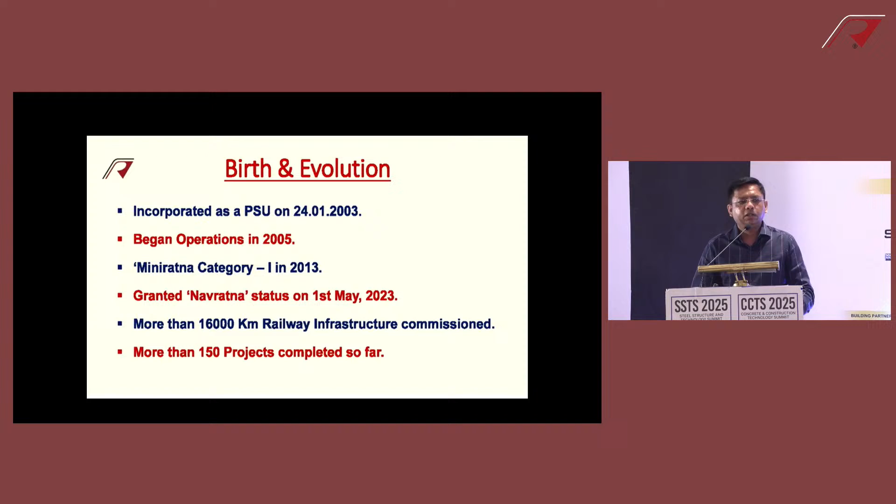Before I begin, I'll give 2 slides on the company I'm working in. I'm on deputation to RVNL. RVNL was a very new company, just formed in 2003, began operations in 2005. We got the Mini Ratna category in 2013, and we were granted Navratna status in 2023. We were primarily into railway infra, but now we've moved to global infra, with presence in highways, airports, and many other projects worldwide.

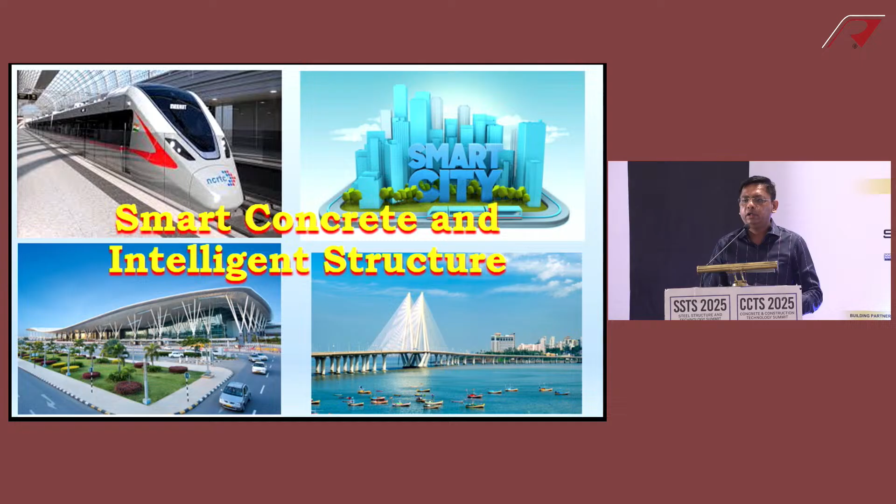The theme we're discussing today, smart concrete and intelligent structures, is very relevant at this point in time, at a time where the nation stands today, and when we think about what we are today and where we want to go 25 years from now. Our Honorable Prime Minister has given a vision to the nation called Viksit Bharat, which means a vision of making India a developed country. So long we have been hearing India described as a developing country. It's time for India to achieve the status of a developed country, and we have a vision to make it a developed country on the 100th year of our independence, that is 2047.

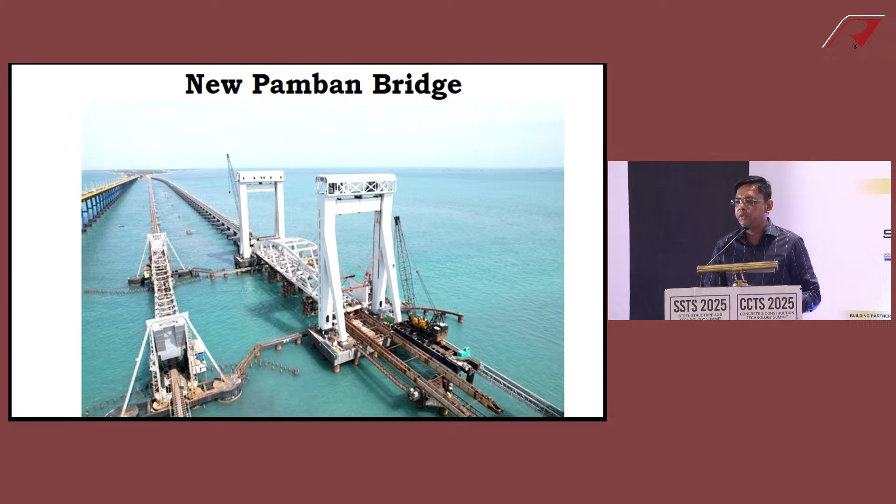One of the modern engineering marvels that RVNL has constructed and just commissioned is the new Pamban Bridge. It's the first vertical lift bridge of Asia, and the Honorable Prime Minister has recently inaugurated it. The old one was a Bascule bridge, and everyone knows it was partially damaged in the cyclone of 1964. Dr. E. Sridharan supervised the restoration, and the old one was a marvel. The new one is even better.

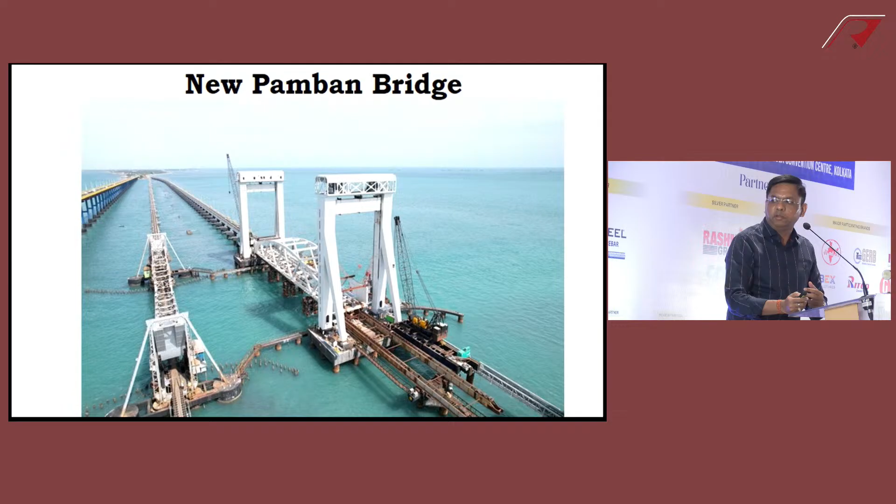This is the Burdwan cable stayed bridge. Why is it important? It was a smart solution to one of the problems. Traditionally, railway lines run through the most important cities, and as cities grow, you get a lot of jams at railway crossings, so these level crossings were to be eliminated. Every major city has a very big railway yard, so if you have a limited span ROB there, it poses two kinds of problems. If you have small span ROBs, there were pillars and piers in between two railway tracks, creating a permanent bottleneck in yard expansion.

So there was a need for a structure with a span long enough, but at the same time the level difference from the top road level to the bottom of the girder should be minimum, because most of these were replacements of existing ROBs, where both levels are fixed - the approach road level and the bottom of the girder, due to clearance from the rail level. For that need, at Burdwan we went for a cable stayed bridge which solved the problem, and now we are building another iconic cable stayed structure in Howrah called the Chandmari Bridge. The erection is almost complete, and very soon we'll be able to commission that bridge too. So that is a solution to these problems.

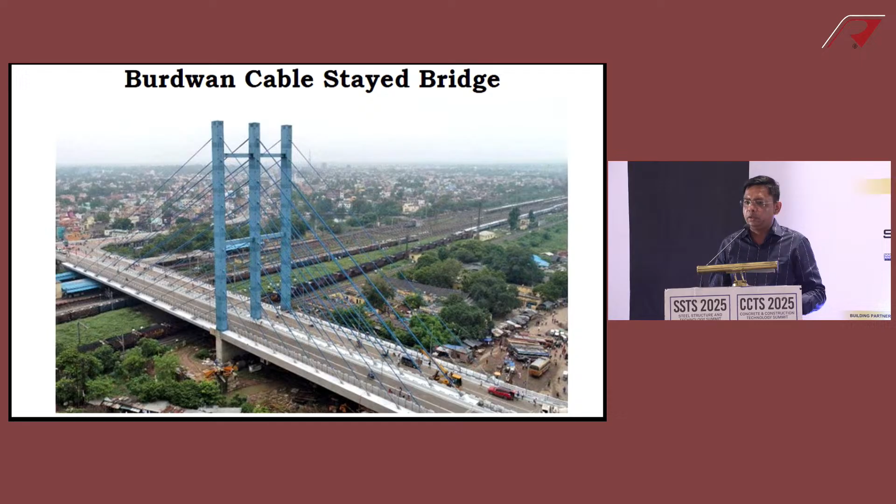Metro projects in Calcutta - RVNL is constructing two major lines in the city of Calcutta. The purple line runs from Joka to Esplanade, which is under construction and I'll explain in more detail. The orange line is from New Garia to the airport, which is also progressing at a fast pace. We are trying to reach City Center 2 by March '26.

A very important station, a smart structure I would say, that we have recently constructed is the Majerhat station. The problem was that when we were constructing this station, the area, called New Alipore or the Majerhat area, is equally populated on both sides, meaning both sides of the metro station need to be given access. If you plan access on one side, the other side is devoid of the facility, and vice versa. So what has been done is a station built over the railway yard.

The Times of India covered this - it is the first metro project with a metro station built over a railway yard. Down below you see the conventional railway lines of the Sealdah division of Eastern Railway, and above is the metro station built over the railway yard itself, with the concourse over the yard. You also see the Majerhat bridge, the cable stayed road bridge here. There is a connection from the metro station to the Eastern Railway Sealdah division station, so suburban passengers can take these stairs to the metro station and take a metro ride, and vice versa. Just outside the Majerhat station there is also a bus stand.

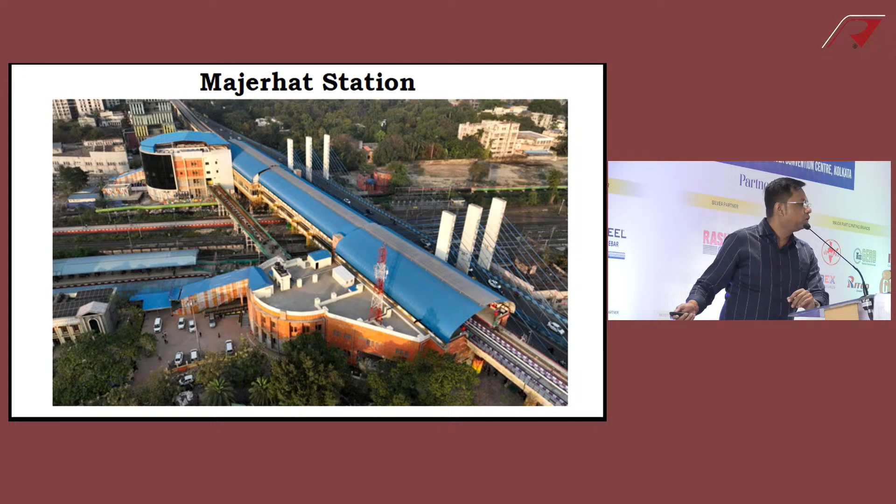This is a first example of multimodal connectivity, a place in Majerhat where you have connection of the bus, the metro, as well as the suburban transport. This is what was conceived in Anand Vihar also, the multimodal transport hub, where the metro, the bus stand, and the NCRTC are all at one place.

That is why when we talk about the national transport policy, they talk about a smart card, meaning every passenger should have a smart card valid across various modes of transport. The same card should be used for buses, the metro, and so on. This is something we are planning, and probably it will be implemented.

This is a recent breakthrough we had in Rishikesh Karnaprayag, another iconic project going on from Rishikesh to Karnaprayag, more than 100 kilometers of line. This is the first time a TBM has been used in Himalayan geology, and we have done successful tunneling on 14 kilometers here, with the breakthrough achieved last month.

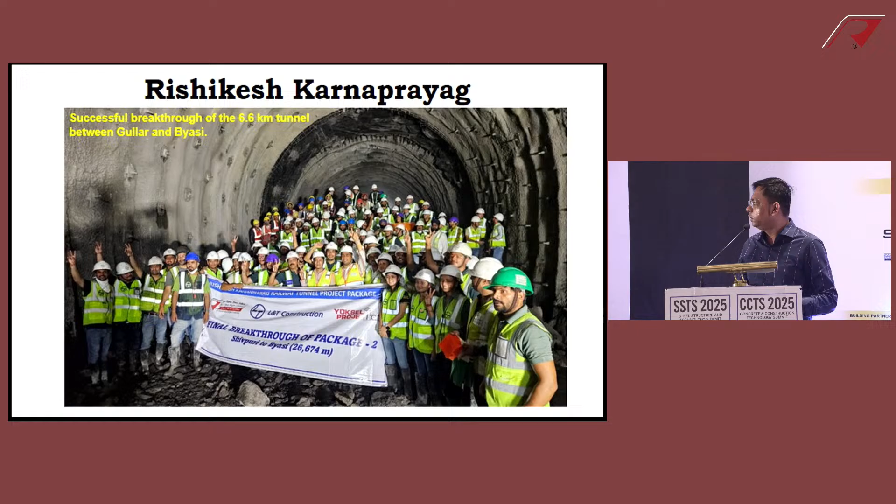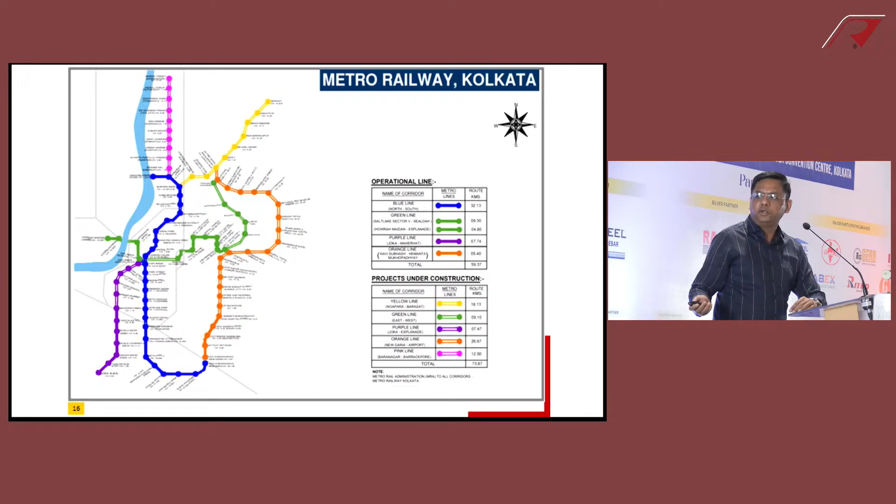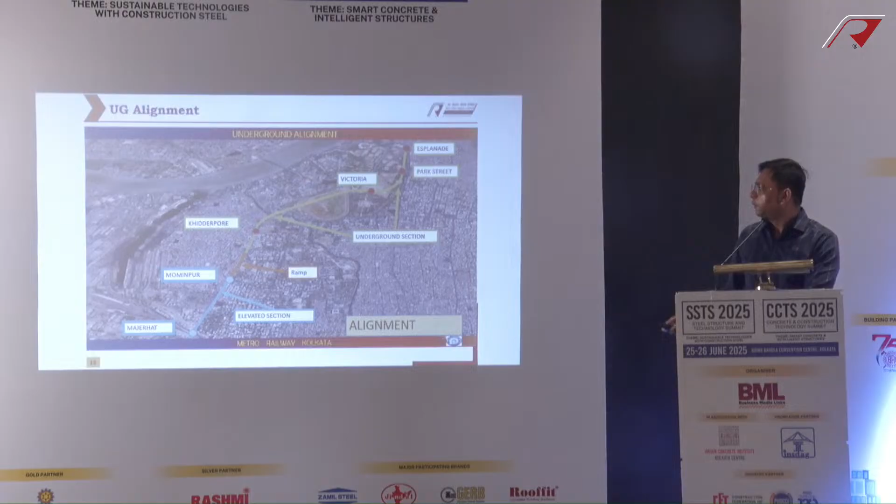In the Joka BBD Bagh section, Joka to Majerhat is already in service, and from Majerhat to Esplanade is the 3rd phase we are constructing. The underground construction is in progress, and tunneling by TBM will start very shortly. This is the overall alignment of the underground metro project.

For example, in the Joka BBD Bagh case study, we are making the entire corridor underground, going under the defense establishment, so a lot of time is taken getting approval from the MOD itself. Once you go further, we have heritage structures, so permission has to be obtained from the ASI. We also have to coordinate with the PWD at all times.

We have to take traffic blocks from the police and the KMC, because the moment you talk about piling or underground work, Calcutta has a lot of underground utilities, mainly by KMC and many other departments. So utility shifting itself becomes a big project within the metro project.

This Joka BBD Bagh project is the first where we have planned transplantation of about 1,000 fully grown trees, apart from 5 times that plantation has been done elsewhere, taking care of the environment as part of sustainable development. If you're talking about an intelligent project, it's a holistic package, not only civil engineering but also electrical, signaling, and environment as a whole.

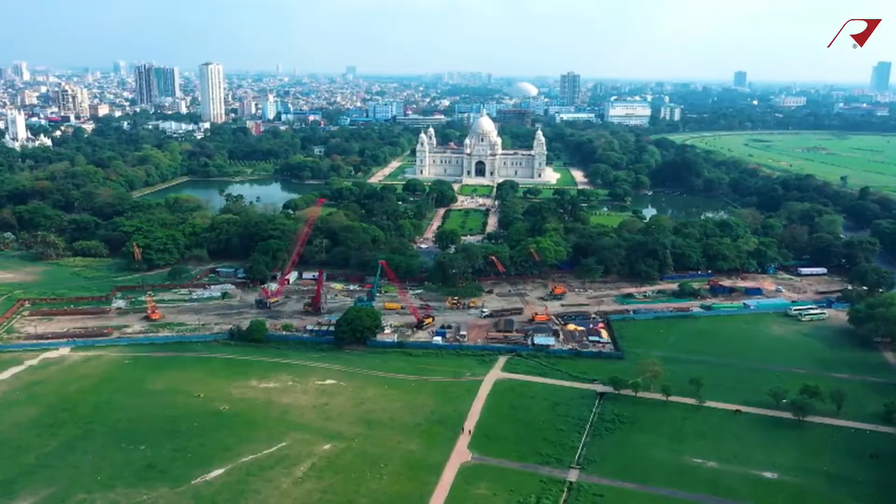In modern times, one of the challenges faced in planning infrastructural projects is maintaining a delicate balance between development and environment. The prestigious and technically complex project of Mominpur Esplanade Underground Metro in the great city of Kolkata also faced this challenge.

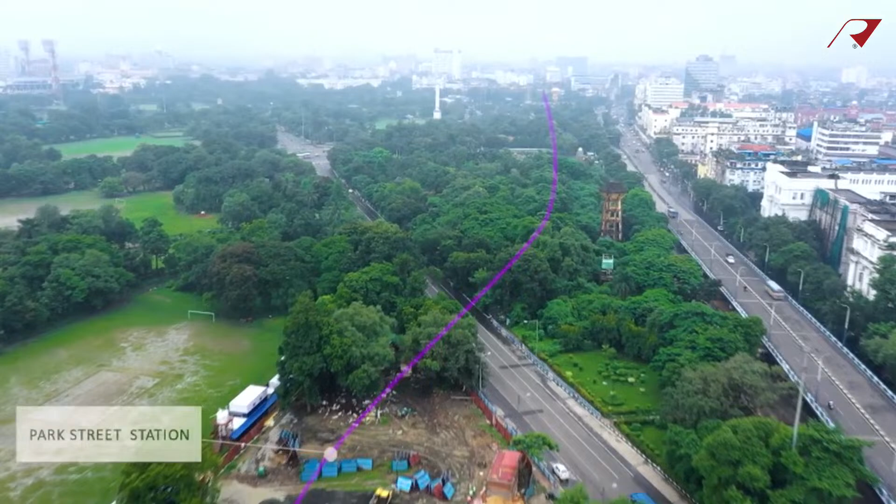In modern times, one of the challenges faced in planning infrastructural projects is maintaining a delicate balance between development and environment. The prestigious and technically complex project of Mominpur Esplanade Underground Metro in the great city of Kolkata also faced this challenge. There are approximately 1,000 trees in the alignment of the project.

In normal circumstances, trees are felled by doing compensatory plantation. But in this case, RVNL not only did 5 times compensatory plantation against each tree, but also transplanted each and every tree without cutting a single tree. You heard it right, all the trees in this project have been transplanted.

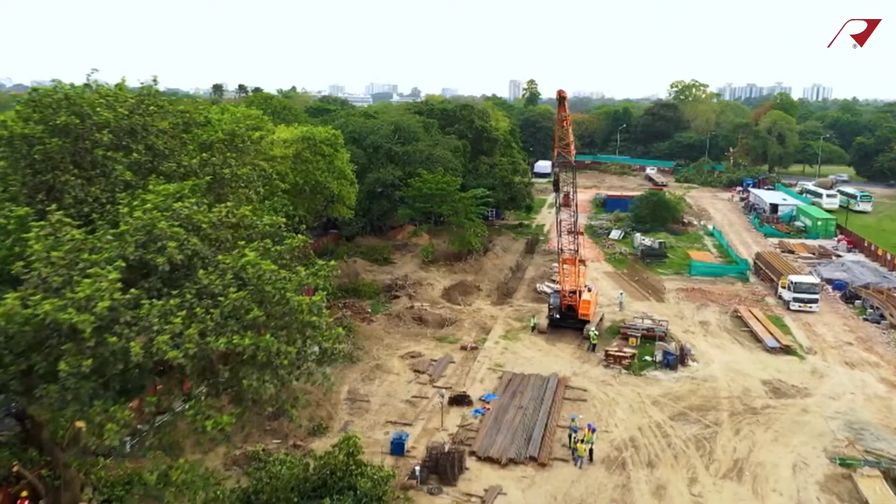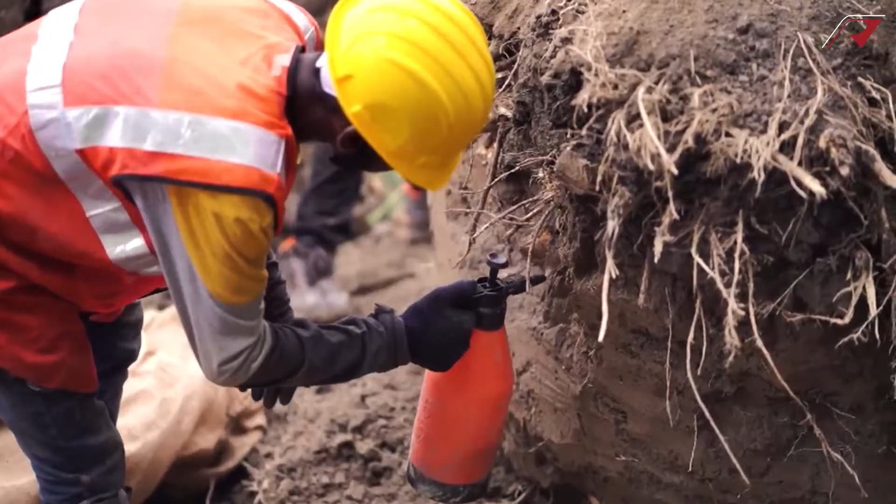RVNL and L&T collaborated and prepared a detailed method statement to execute this work of transplantation in a scientific manner under expert supervision. The big and heavy trees are first trimmed to make them lighter and transportation ready. Then the soil near the tree is excavated. The roots of the trees are treated with special chemicals to enable them to retain moisture and nutrients during the process of transplantation.

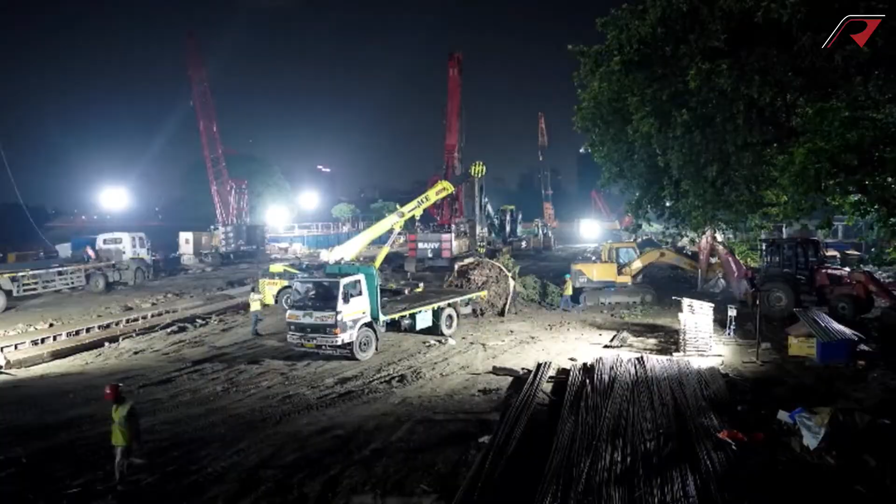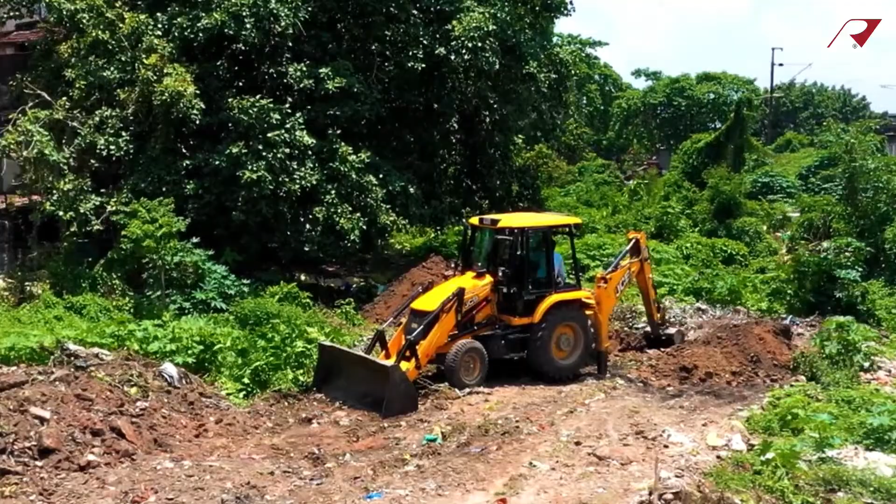The tree is then extracted from the ground using a road crane and loaded on a trailer to transport it to its destination. At the location where transplantation is to be done, a JCB is required to excavate the ground, and a hydra is required to unload it from the trailer and plant it back. The tree trunk may initially be supported using ropes from the ground till the tree is firmly rooted in the ground.

With extra care for a few initial days after transplantation, the survival rate of transplanted trees can be increased.

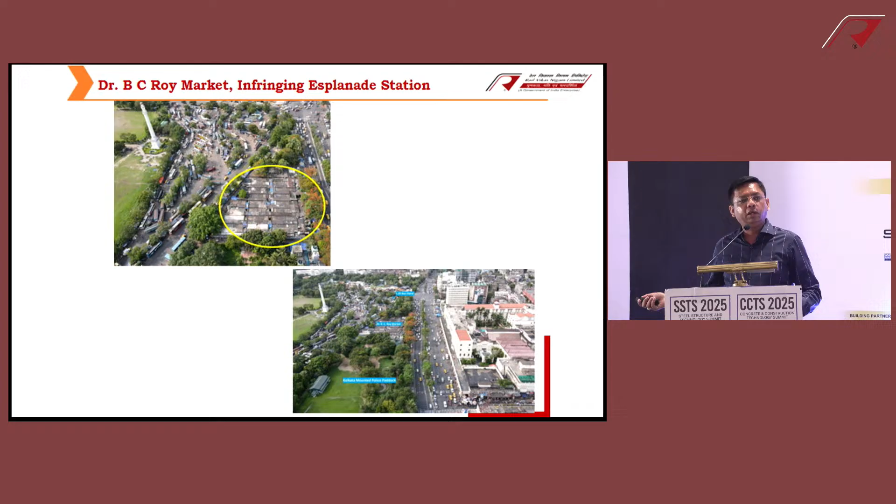So we solved it in a unique manner, we proposed a unique solution. We are constructing a temporary BC Roy market here, shifting all these people here so that their livelihood is maintained and not disturbed, while we construct these stations. So we came up with a technological solution.

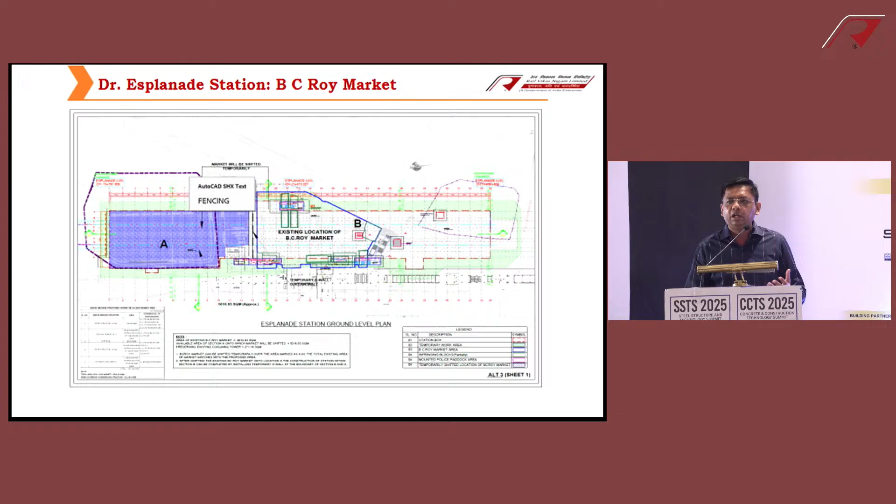Instead of constructing the whole station in one go, the station has been divided into 2 parts. First, this part of the station would be constructed. The top slab is designed in such a manner that the whole market will come back on the top slab, and when this market comes back, the remaining half of the station would be constructed. This way, the status quo is maintained. It's a win-win situation, the people don't get displaced, and the project also gets completed.

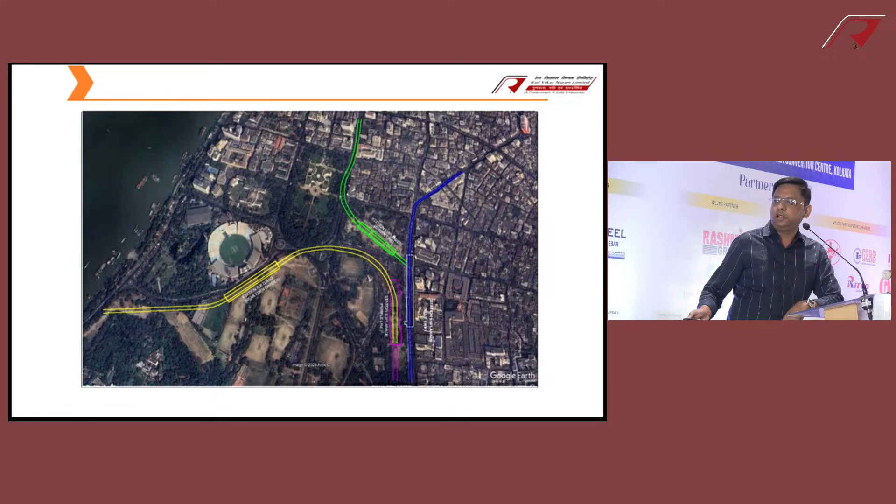This is another thing we planned for the city. This is the old blue line, Calcutta's old first metro line of the country itself. This is the green line coming from Howrah to Sealdah, and this is the purple line coming from Joka side, South Calcutta. So 3 Esplanade stations will be constructed here, 2 of them are already operational, the 3rd one is coming up. This becomes more or less like the Rajiv Chowk of Delhi.

And now to have a seamless transfer, a common plaza to make this whole project, this whole structure an intelligent structure, for ease of traveling, a common plaza is being constructed here. That would enable a very seamless transfer of passengers from one system to another system.

Also, this line is being extended, planned up to BBD Bagh, a new BBD Bagh station near the Eden Gardens, because Eden Gardens did not have any dedicated metro station. The line can be extended right up to here, where in future, if the city plans to have a water metro, because it has a very nice front, we can have a multimodal transport where all kinds of transport are available at one place.

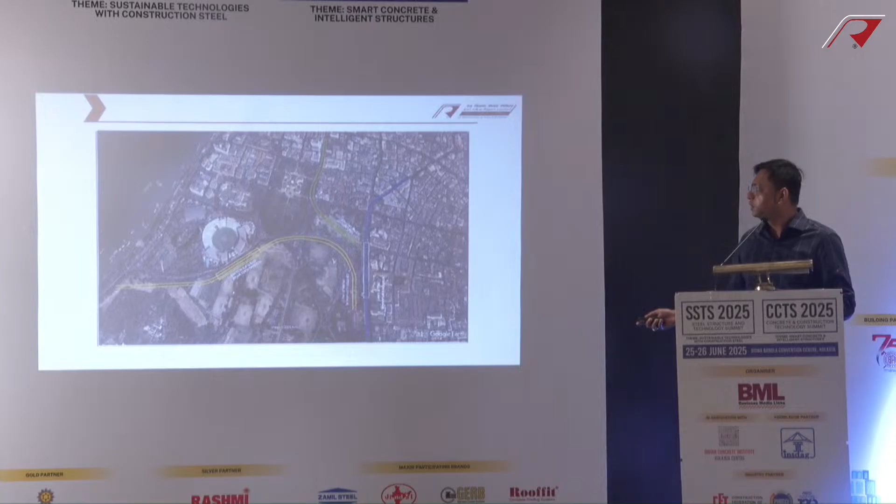This is where the common plaza is planned. We have started doing tunneling. We are expecting to start the tunneling from the St. Thomas School towards the Esplanade in another 1 week's time.

The TBM has been lowered. These are the various kinds of TBMs that are used, and we have used EPB. Every TBM is selected based on the geology that we have. In Calcutta, we have very soft soil, so for that, EPB, which stands for Earth Pressure Balancing Machine, is used.

In other areas, for example Mumbai side, there you have rocky strata. So many times water lines are laid, and a gripper type machine is used for the rocky strata. That kind of machine is used in the Himalayan region, for example, we use the single shield TBM. So depending on your requirement, the TBM is selected.

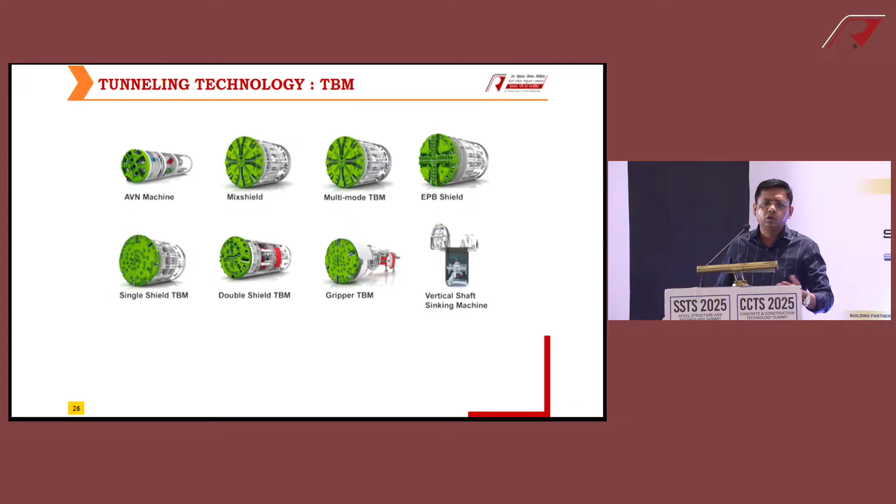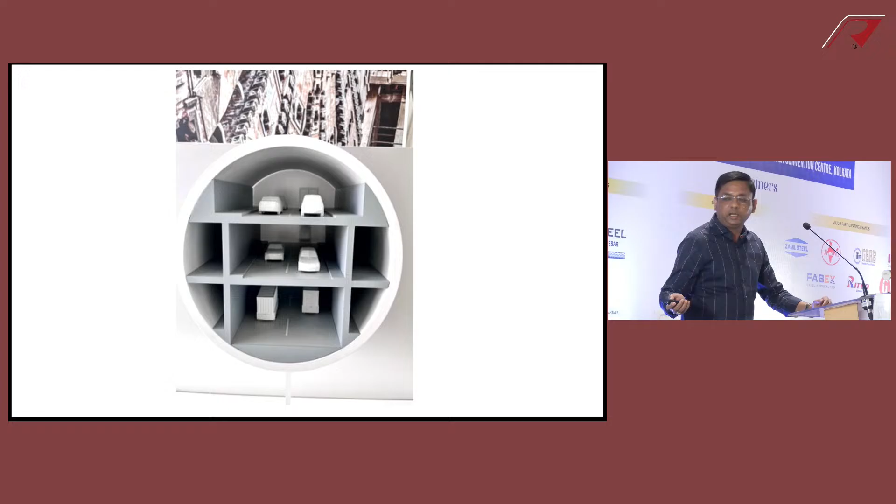This is the alignment of the TBM, and this is the future of tunneling. This is what I saw in Germany at Herrenknecht. Now the tunnels that are made are not only for railway or roadways. It's about making big, large diameter tunnels, and in one tunnel you have the facility for the roadways. You also accommodate the railways, the metro, and more than that, the water supply system, the sewage systems, etc.

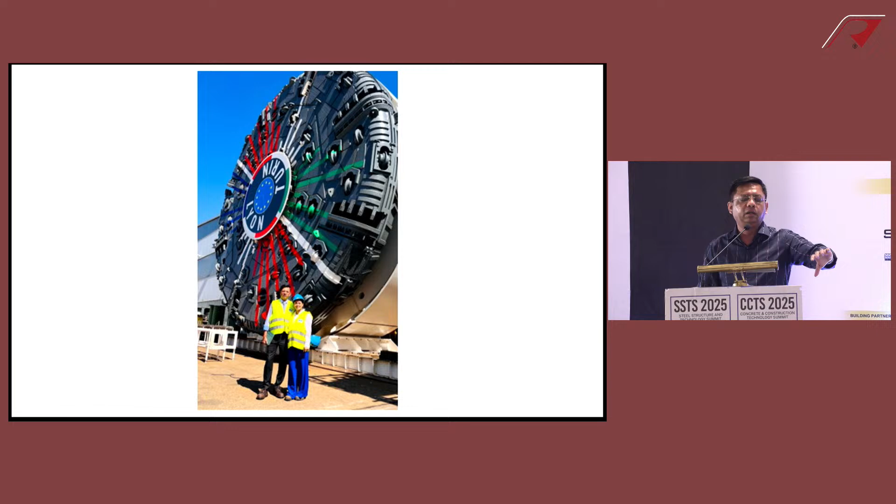This is the 18-meter diameter TBM that they have made. In metro, the diameter of the TBM is 6.3. The ID, the internal finish diameter, is 5.5 meters. But we have machines now which are 18 meters diameter. Once you have an 18 meter diameter, it can be compartmentalized, so you don't need to have a new tunnel for everything. Many of your facilities can be accommodated in a single tunnel.

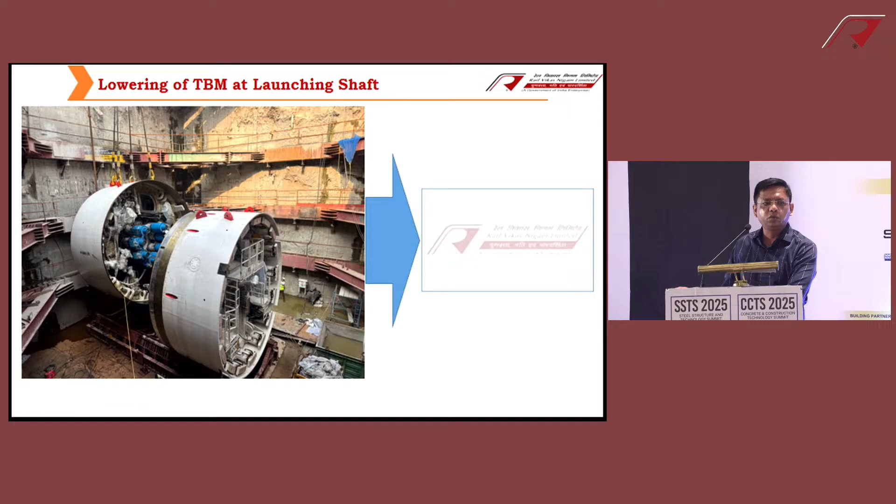I'll just show you the lowering of a TBM that we have done, just completed, and about to start the TBM by next 7 days. I'm sharing with you what we have actually done, not what's written in the books.

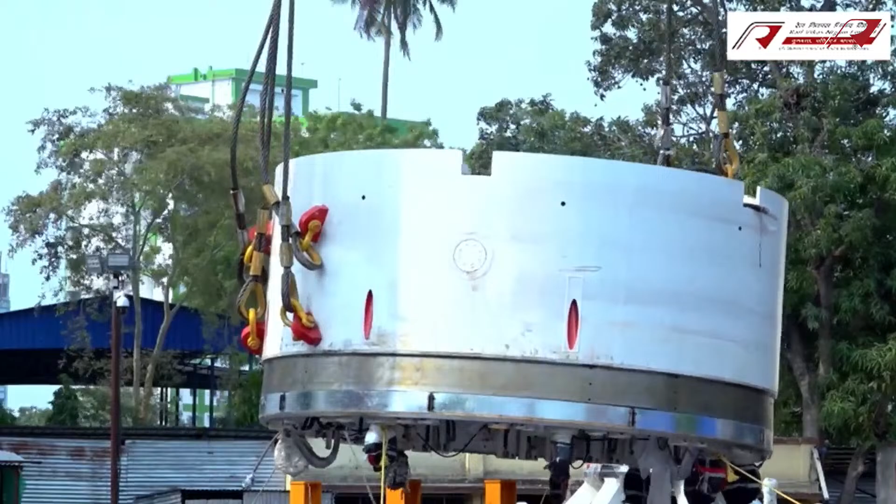That's the metal shield of the TBM. It weighs 130 tons.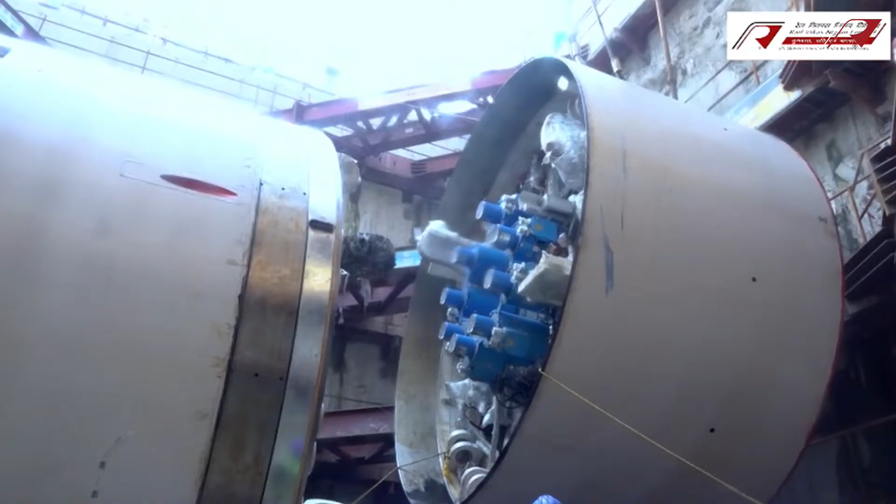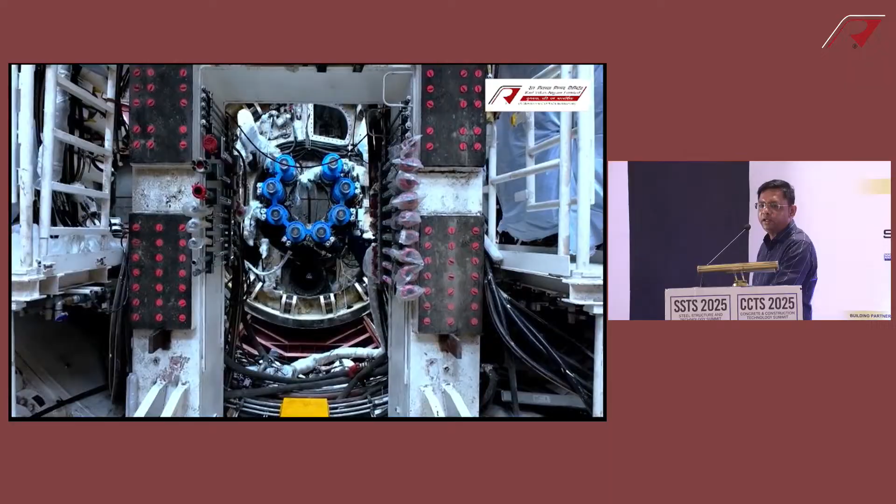The TBM has 3 shields. Each shield weighs more than 130 tons, and a 700-ton crane is used. It's very rare in this country to have a 700-ton or 1,000-ton crane. That's the joining of the shields once they are lowered.

This is the cutter head that actually cuts the soil.

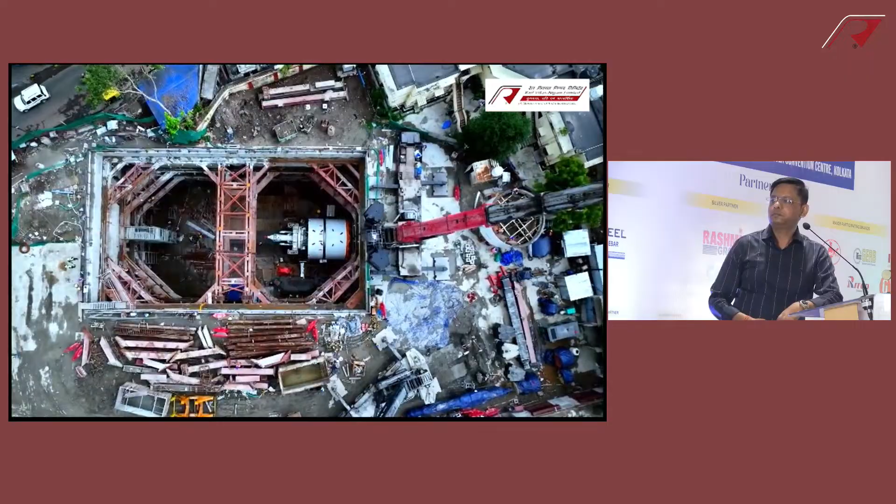St. Thomas School and the church. We are just working beside the church.

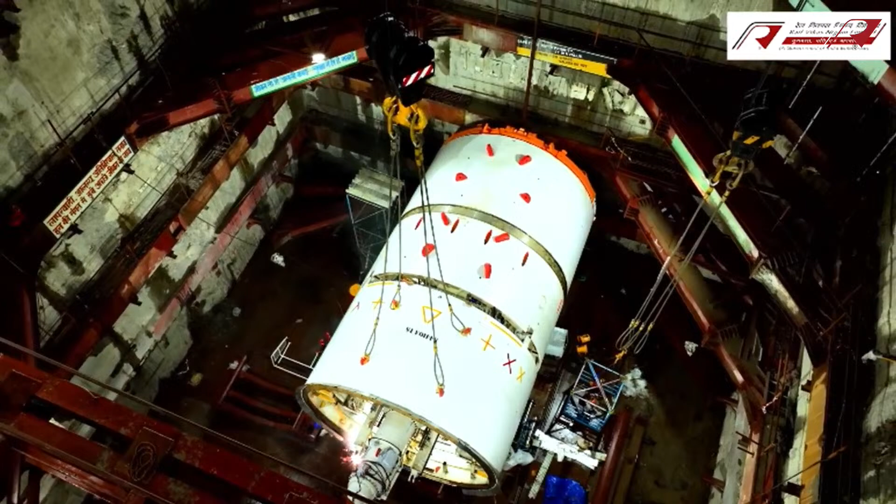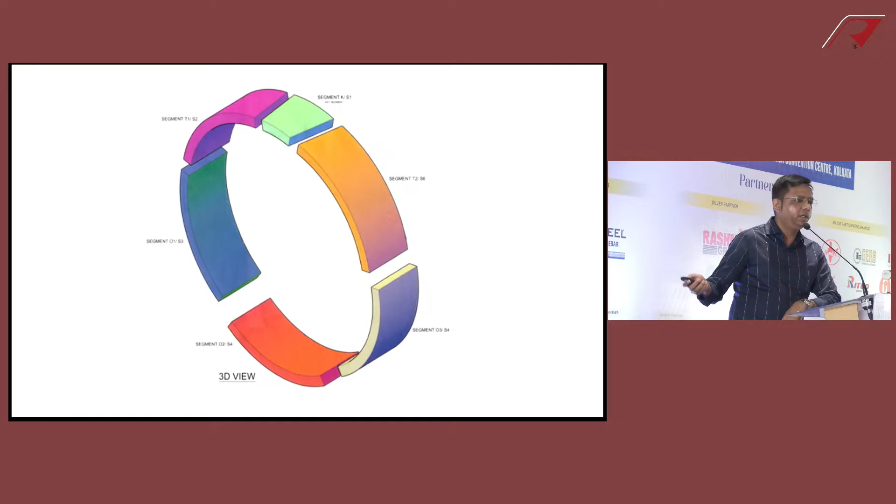So that's 45 days of work I have shown you in 3 minutes. The tunnel that we make is made of these rings, and you join 6 segments and you get the ring. This is how we have already cast 1/3 of the tunnel that we are supposed to build. We have an area called Santoshpur near Rajarhat where we have this casting yard.

It's a very nice casting yard. I would in fact invite all of you to visit my TBM site and casting yard. It will be an enriching experience for you. It's spread over 12 acres of land there.

And this is the underground metro station. Why I'm showing you these two things is because most underground metro projects are made of these two things only: there is the tunnel and there is the underground metro station. Both of them are concrete. So once you understand this, we move to the concrete.

It's a top-down construction that we do in this part of the country. For example, if you go to Mumbai, in the high-speed corridor, I was seeing the Bandra Kurla Complex station that is happening - I'll just show you in the slide. There they are doing bottom-up construction. They have that facility because it's rocky strata, so they can actually go to the bottom level and then start constructing bottom-up.

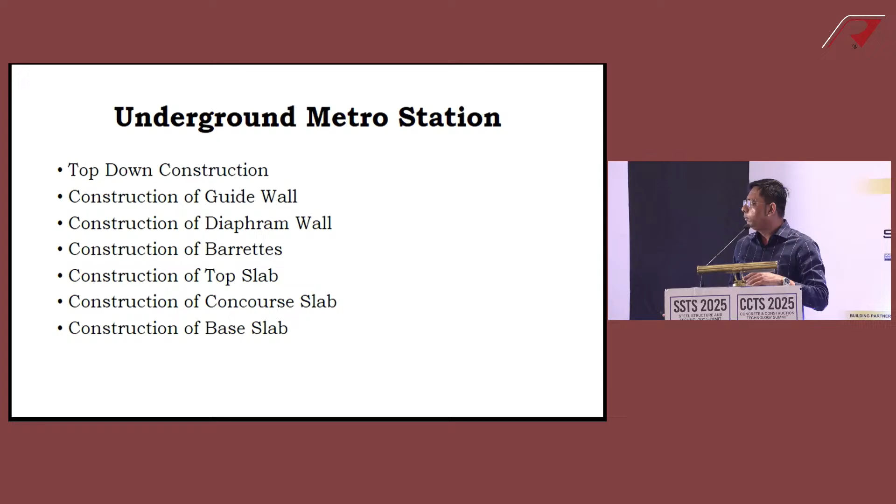But here, because the soil is very soft, retaining it is a very difficult process. So it's a top-down method where you construct the D wall first. This is the D wall, the diaphragm wall, as we call it. Diaphragm wall is constructed first. Once the diaphragm wall is constructed, you have a rectangular form. Then you start excavating from here.

When you start excavating, normally there is a cushion of about 2.5 meters for the top slab. You do that and construct the top slab. There are cutouts left in the slabs. From the cutouts, you enter the excavators down below, reach the concourse level - then, did I miss one part?

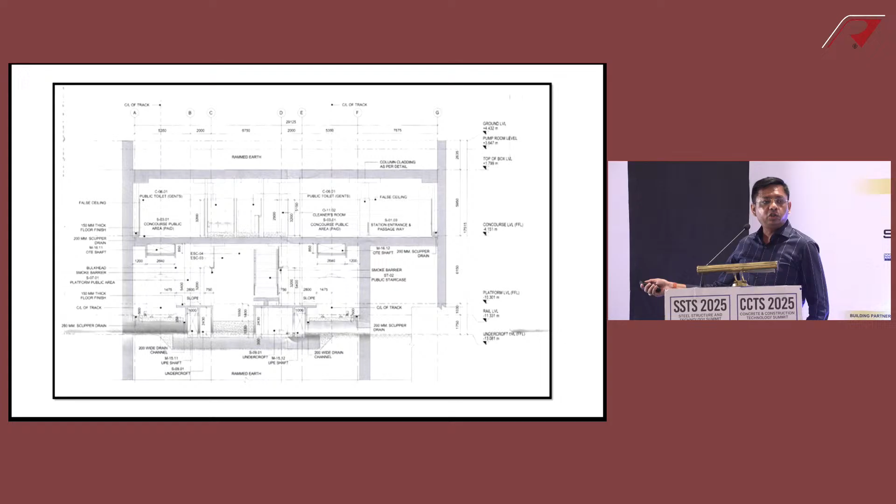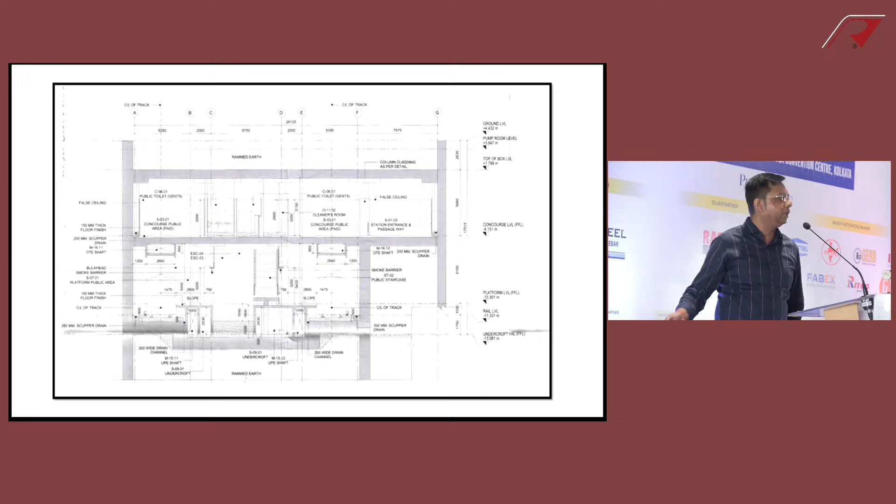Once having done the diaphragm wall, you do the barrettes first. You do the barrettes, then you come to the top slab, then you do the concourse slab, and then you do the base slab. So basically, since you are coming from top to down, it is called the top-down method of construction.

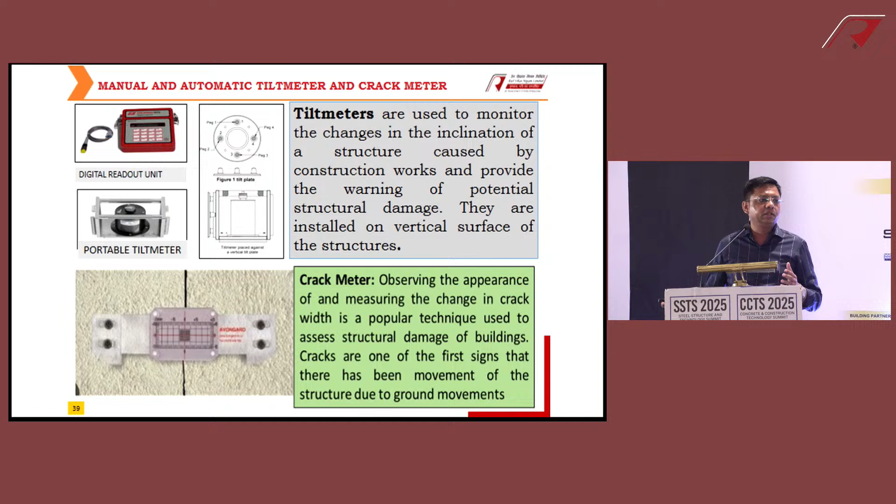So basically, these are our eyes and ears - this instrumentation, these crack meters, inclinometers - this is very detailed, it requires another session to discuss the BCS and the instrumentation, but this is what keeps us alert all the time. Based on this, the alert values, what we call AAA - alert, action, alarm - are generated, and it is very important from the safety point of view to monitor and maintain this.

Now coming to the concrete here, we call it smart concrete. With my understanding - I don't have that much experience, small experience of 23 years - we started in railways, where M20, M30 used to be traditional, considered to be good. Even the RCC boxes, most of the bridges, M35 concrete has been used. But the times are changing.

We talked about the strength of concrete, we talked about high strength concrete. M40, M50 was called the high strength concrete. Then we started talking about high performance concrete. If you see IS 10262, it says that M65 and above is the high strength concrete.

Then when you talk about the difference between high strength and high performance concrete, the compressive strength of concrete is not the only thing - that's an old concept. As sir has already explained, high performance means apart from strength, you're talking about durability. Durability is the keyword that you require. So durability, the performance, the resistance against corrosion, that again depends on your durability.

Now, as I said, I will show you a video. Sir was saying we have already achieved 150 MPa. How many of you have seen that? So I'll show you a video. I've actually broken the cube of ultra high performance concrete in front of me, taken it up to 180 MPa. I'll show you the video there.

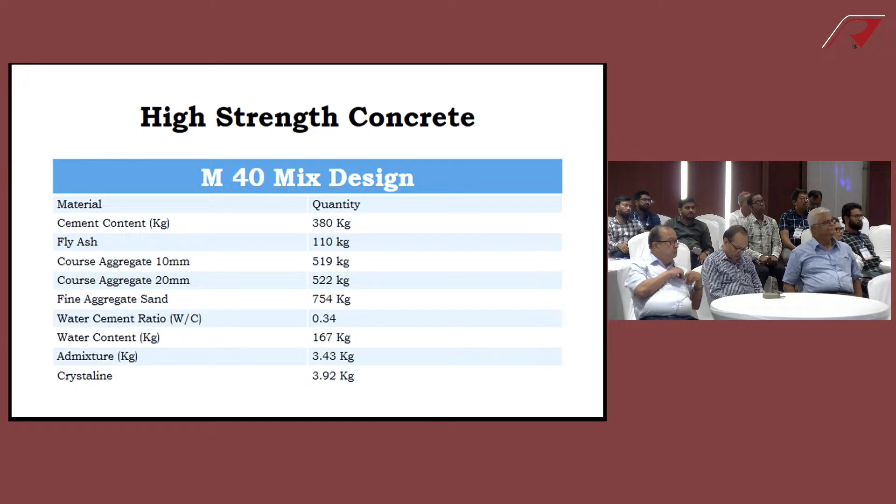So this is the M40 mix design that we are using in the diaphragm wall construction. Again, whatever I'm telling is not from any book - this is actually what we are doing here in the Rajarhat Esplanade project. So in M40 we are using fly ash.

Again, when we talk about smart concrete, environment, you talk about sustainable. Environment is a big thing, and the carbon footprint is very, very important. If I'm not wrong, 1 ton of cement production accounts for nearly 0.6 tons of carbon dioxide, and 8% of the total global emission of carbon dioxide is due to cement production. That's on Google also if you want to check.

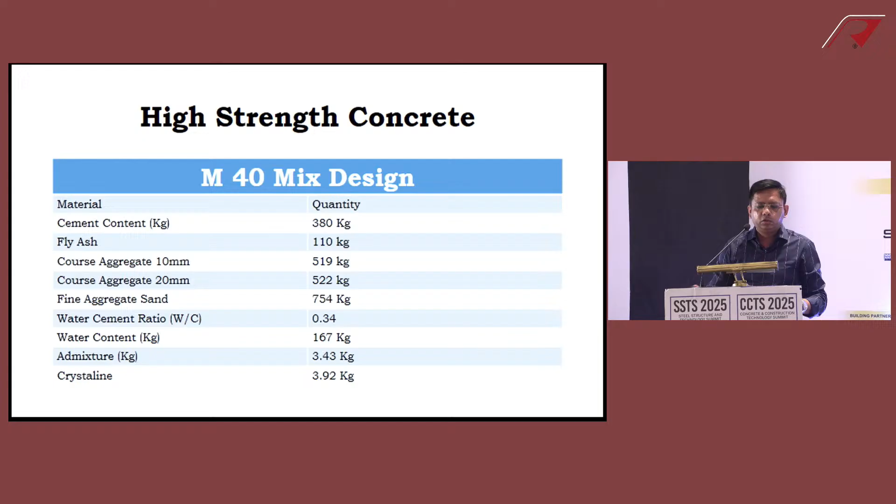So one way of reducing the carbon footprint is to reduce the cement content by using what is called mineral admixtures. Mineral admixtures would mean using silica fumes, microsilica, GGBS - the ground granulated blast furnace slag - and fly ash. So in the diaphragm wall, based on the requirements we have, we are using fly ash in the M40.

This is the M50 mix design we are using for the tunnel segments, the 6 segments I showed you. Here we are using microsilica. And importantly, we are using the crystalline admixture in the diaphragm wall - it's not used in the tunnel, there the microsilica is sufficient.

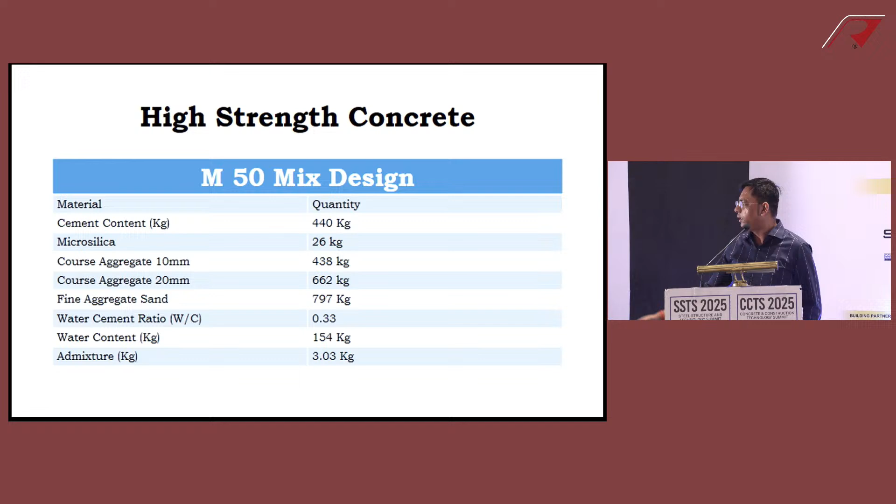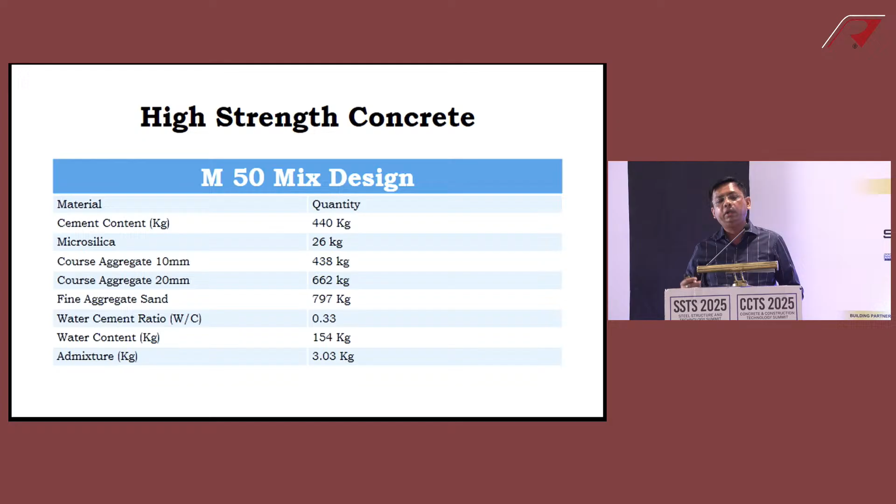Now in railways, when I was doing projects there, for example new line, gauge conversion, doubling, the specification was that a permeability of 25 mm was allowed. But in these underground structures, the specifications are stricter and only 10 mm is allowed. So when we are using this mix design and doing the permeability test, we are actually getting results of 4, 5, 6 mm, not more than that.

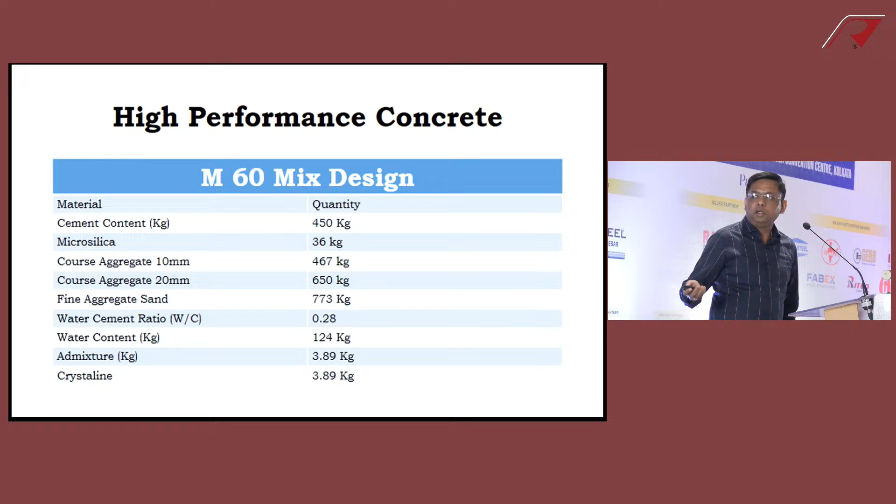This is again the base slab we tried for, one of the base slabs we wanted to do. We are doing another project in the city of Calcutta, rather it's Howrah, called the Kona Expressway. People from the city would recognize it. I'm blessed to be heading these two projects of Kolkata and Howrah, and there also we are doing pretty well. In the last one year we have almost done 600 piles there, and we have started the girder casting from today.

Today the first girder of Kona Expressway is being cast, where we are using M60 concrete design. When you are talking about such high strength concrete, quality control is very important. What we are doing differently from my earlier railway projects: when doing up to M30, M35, frankly we were only checking the quality of water. But here we are talking about M50, M60.

The thermal gradient of the concrete is very important to check. That is why we have installed an RO plant as well as a chiller plant in the casting yard itself. So the water fed to the concrete when mixing is at a temperature of about 2 to 5 degrees centigrade. When we were doing concreting in the month of May, we were actually mixing ice in the chiller plant to keep the pour temperature below 32 degrees centigrade, which is specified for concrete up to M60 grade.

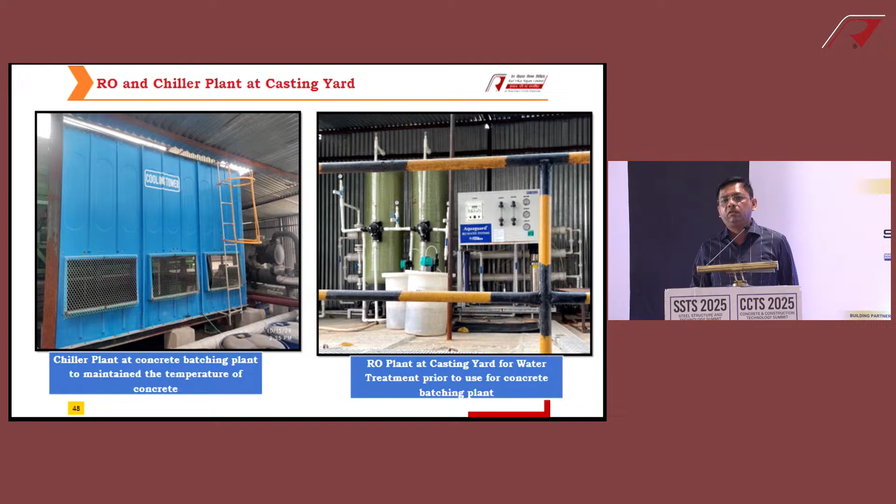Let me explain for M80 concrete: the pour temperature specified is 25 degrees centigrade. When doing that kind of high grade concrete with that kind of cement, even a chiller plant does not suffice. There we had to install an ice plant.

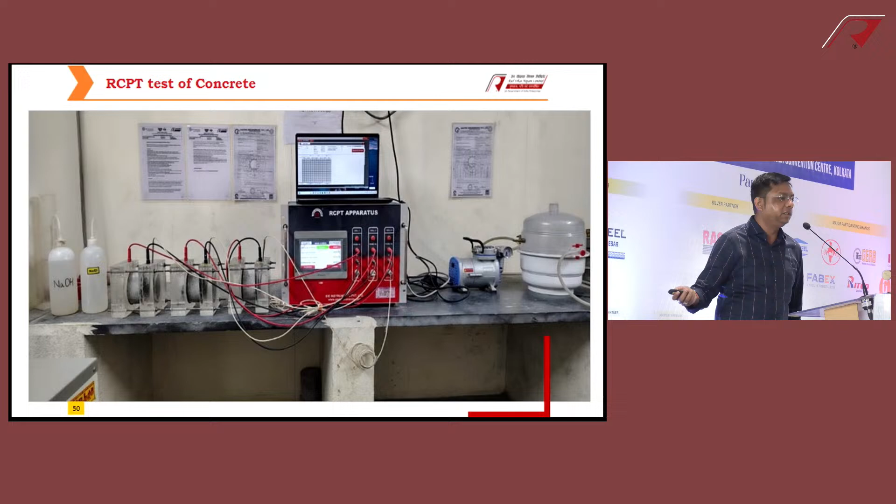This is the site laboratory that we have established. Again, from Jadavpur University, I would request sir, you can any time bring your students here, they would be happy to see these facilities. The RCPT test, sir was already telling about it, is being done at the site. Of course, third party also did it.

Permeability test is very important. Most people get it done from third party, but we have the setup in our own laboratory to check permeability. This is the high performance concrete, in fact this is the mix design being followed in the National High Speed Corridor project, Mumbai-Ahmedabad. They are using microsilica as well as GGBS there, and the cement content for M80 is just 375, but the overall cementitious content is this one.

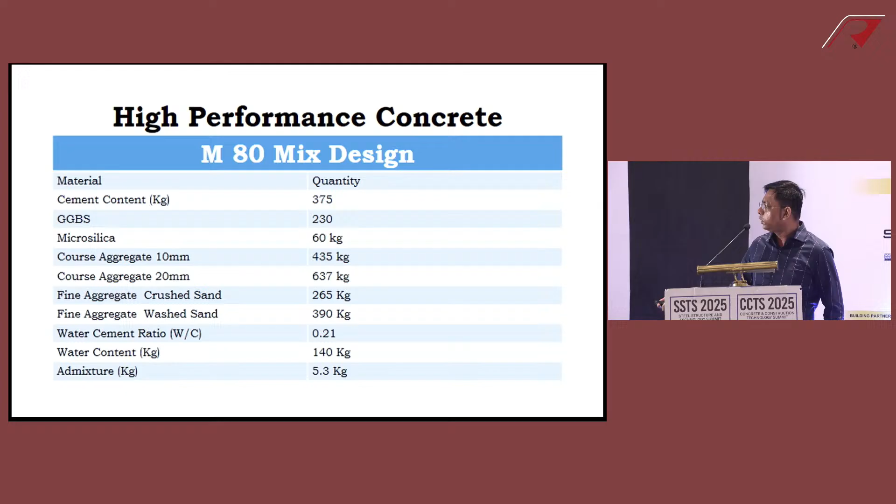They are thinking futuristically because this station design has already taken into consideration that a 90-meter height building will come on the station. So they are leaving a foundation for that 90-meter, 22-storied building right now, so that in future it can come and commercial exploitation can be done.

So what do they do to control the temperature? They install thermocouples. Thermocouples are installed at our site also, because when we do the top slab at certain locations where the concrete is 1200 mm thick, we install thermocouples to measure the thermal gradient.

It is specified that there are two things: pour temperature and core temperature. The core temperature is specified in their contract itself - it says the core temperature will not rise beyond 65 degrees centigrade. So if the core temperature must not rise beyond 65 degrees, even though the pour temperature on the outer periphery is specified as 25, it was not working out with just the chiller plant. Finally, the pouring of that M80 concrete is done at 16 to 17 degrees centigrade.

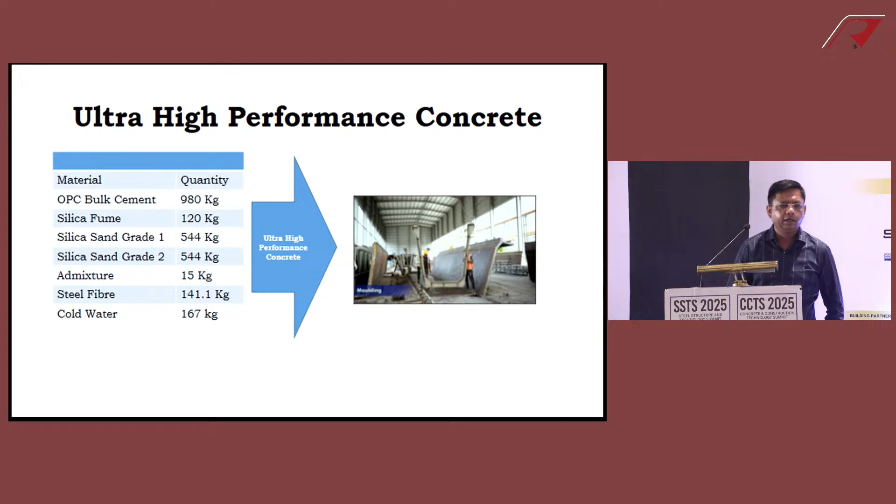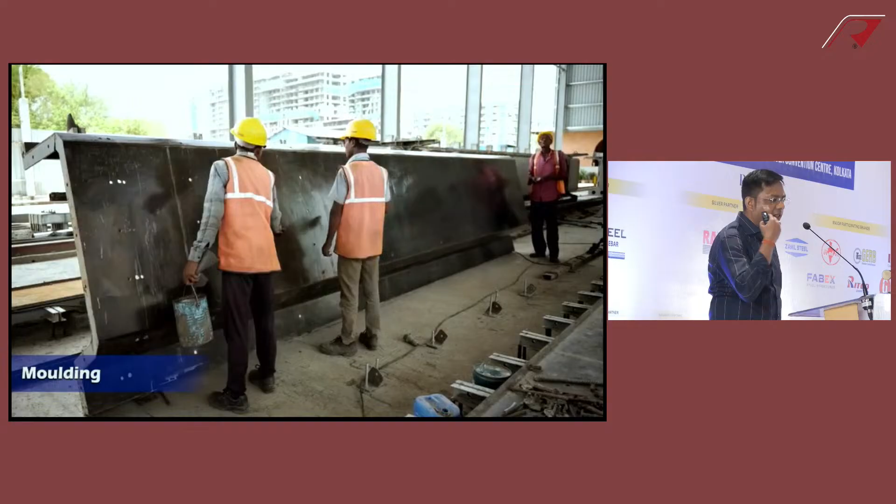This is one of the facilities in Pune. I'm not promoting anyone's name, but I personally visited to see, because seeing is believing. When you talk about M150, it was difficult to say that yes, it is being produced. So I wanted to break a cube in front of myself, and when I did that, I'll discuss.

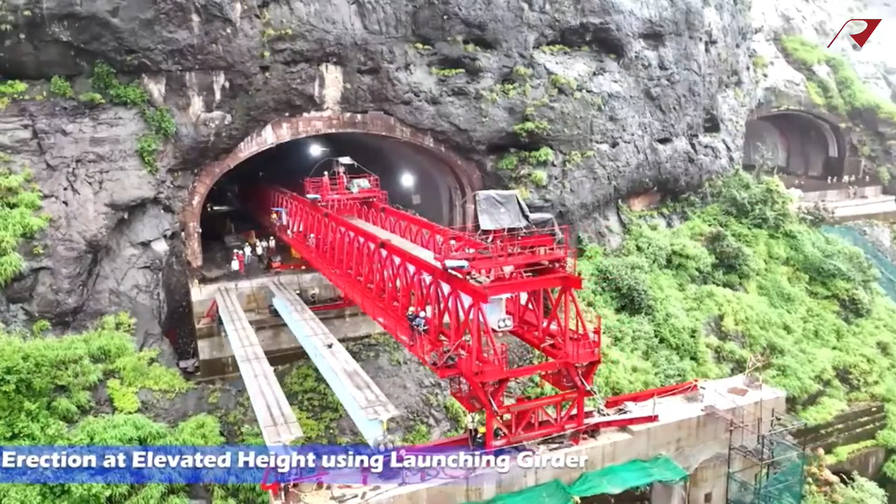Mumbai-Pune missing link.

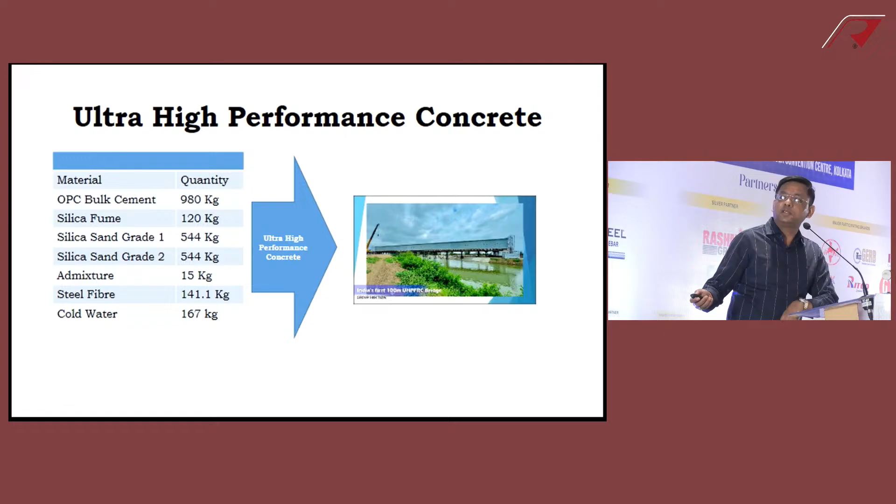As the time is short, I'll just rush through. If you see here, there is no coarse aggregate in the mix design, but see the cement content is as high as 980 kg, they are using silica fume 120 kg, and the water cement ratio there is actually 0.17.

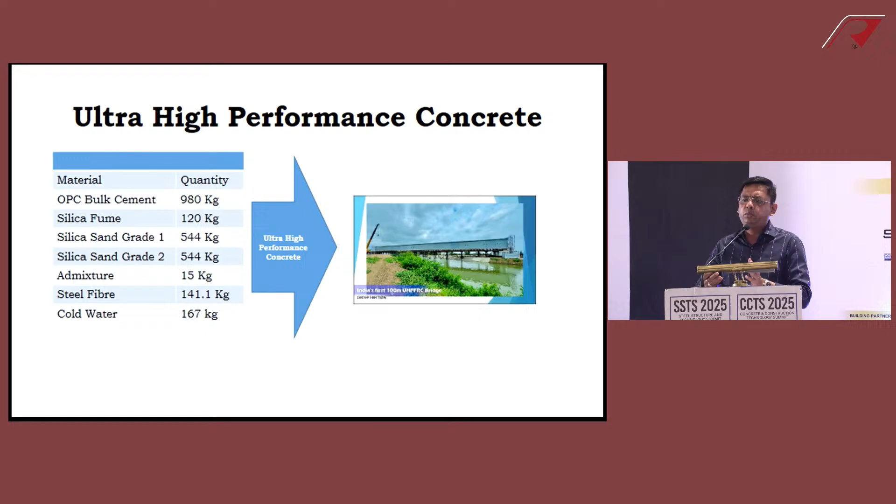I agree with sir what he was saying, 0.17 sir, we don't find any problem these days. Yes, there are various literatures from which I have also read, 0.23 somewhere, 0.28 somewhere, 0.18 also somewhere, but they are mixing and producing at 0.17. MoRTH has issued guidelines, and recently RDSO has also issued the guidelines.

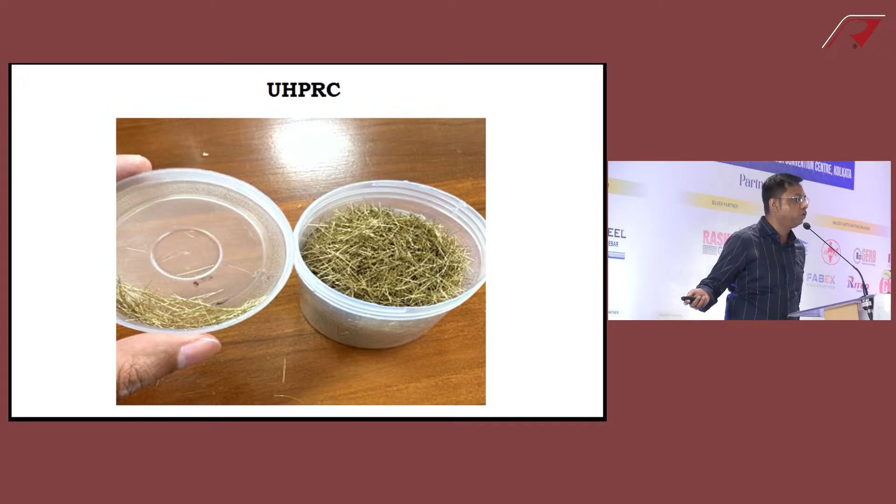This is going to be a big advantage. We are still in the testing phase, because imagine re-girdering for railway projects, the weight of the girders is tremendously reduced, so the requirement of cranes can be tremendously reduced. Instead of conventional reinforcement, there are steel fibers that are used in the ultra high performance concrete.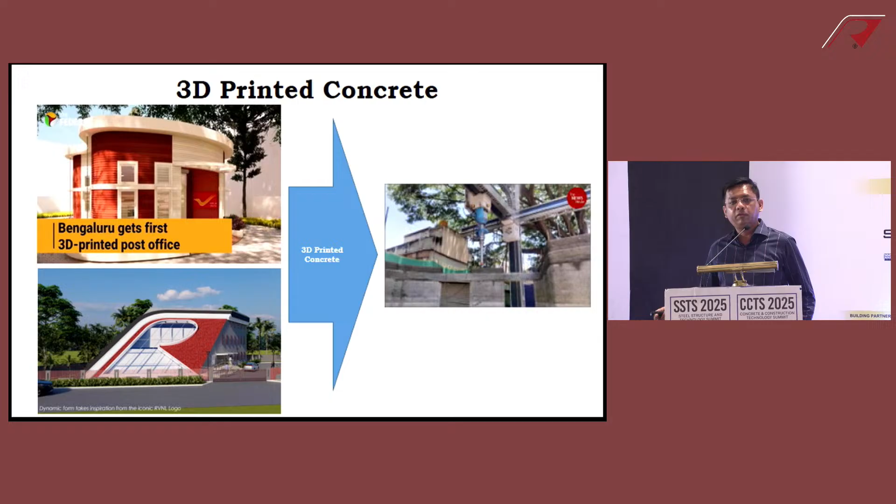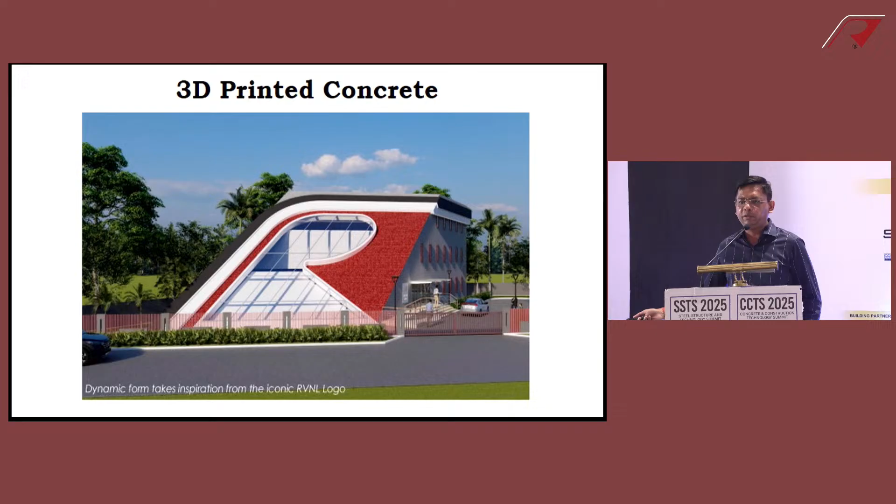Another thing that we have promoted is 3D printed concrete. Time is short, so I'll not show you the video, but yes, it is being done, many places have done it, and this is an RVNL convention center which we have planned at Rajarhat itself, 3D printed. When we do that, I'll invite you to come and see.

Most of the dignitaries have come - the CMD of RVNL, Sri Rajesh Moghe, the GOC Bengal sub-area, the General Manager Metro Railway, the DFCCIL team, and the defense team from the College of Defense Management.

And this is the last thing I want to say. I am a student of science, did only my graduation, did not do any masters or PhD, but I love technology and love to promote new technology as and when I see it. Because as he rightly said, the illiterate of the 21st century will not be those who don't know how to read and write, but those who cannot learn, unlearn and relearn. This is the way to go forward. Thank you so much.

I would also like to mention just one line. If you ever happen to visit Rajarhat, I would invite you, it's a state-of-the-art station. We have introduced CBTC, that's called Communication-Based Train Control, which in common language means a driverless train. It has been the first line we have commissioned in Kolkata, the purple line from Joka to Rajarhat. Thank you.